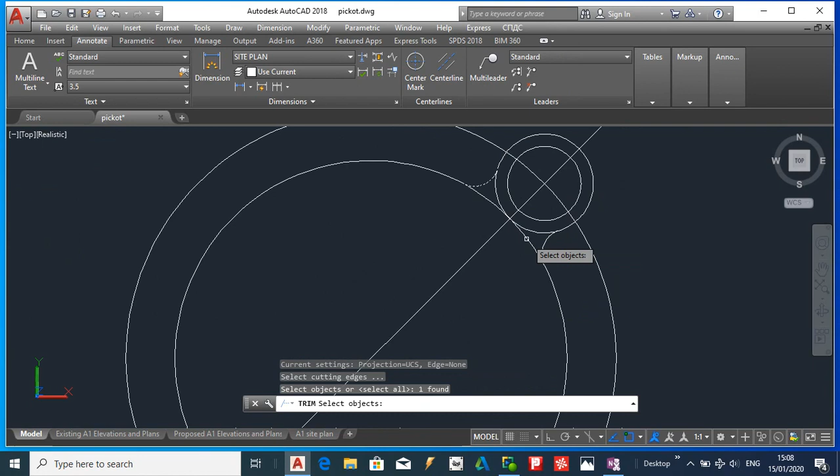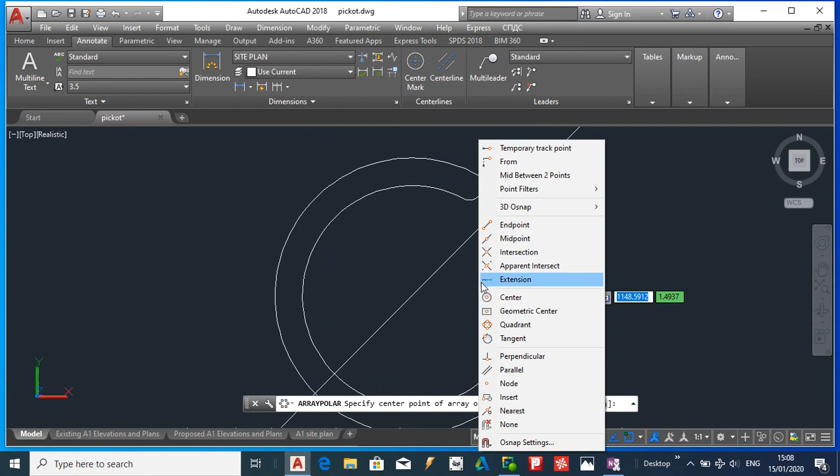The next thing I need to do is rotate that, array that around 5 times. Select that, modify, array, polar, and I want to pick the center of this circle here. It says 6, but I'm going to just leave it at 5, so it looks pretty much like the last one I did.

I still need to do a bit more trimming, so I'll just select those parts here.

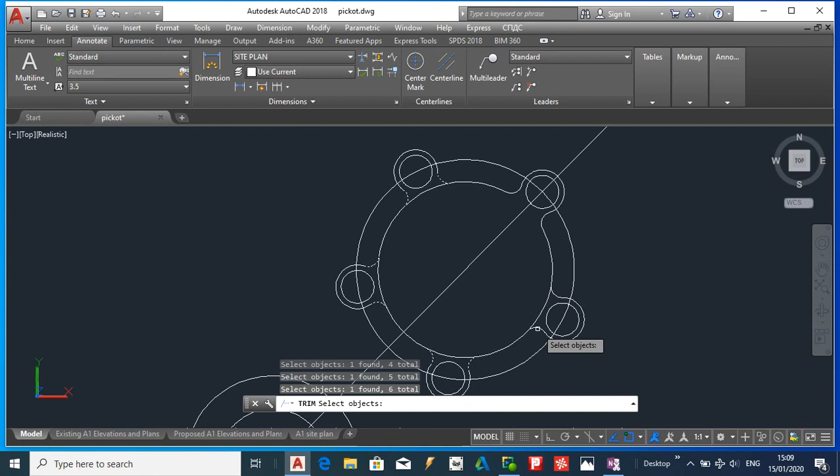And the next thing I want to do is create a fillet between this circle and this circle. So I'll bring up my fillet command again, and I'm going to select the radius of 150. The same over this side.

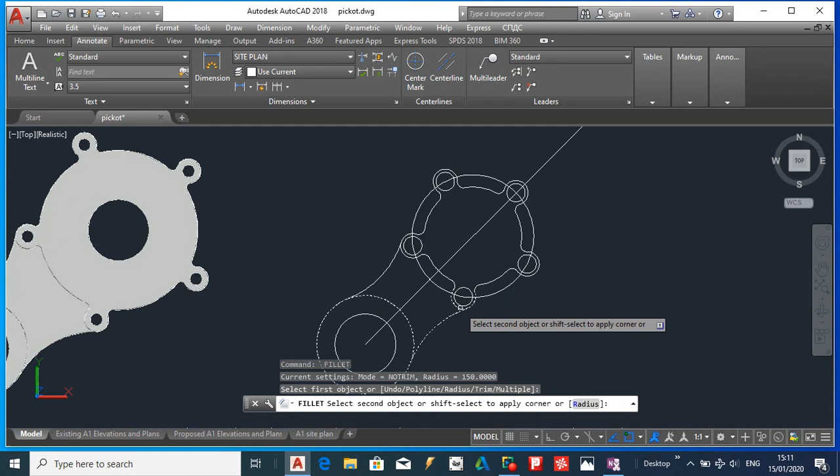Okay, so that's basically my part created there. The next thing I want to do is get rid of that line. And the next thing I want to do is get rid of this as well.

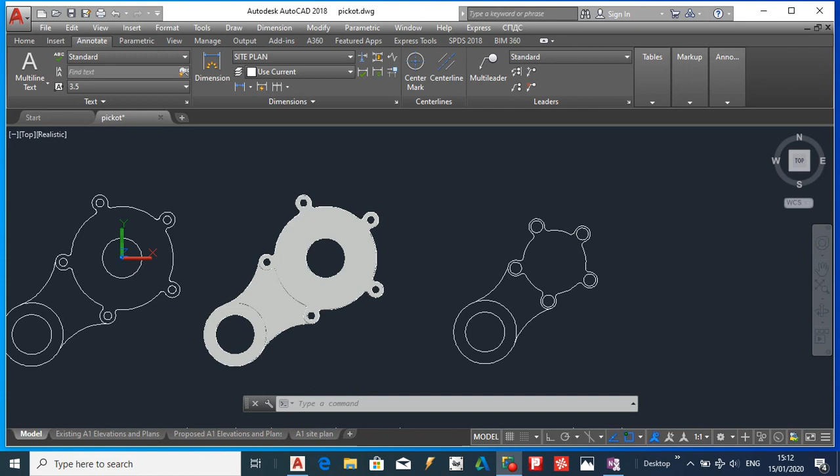So I want this to look like a 3D part like this one here. And if I just angle this around here, what I'm going to do is use a command called bpoly.

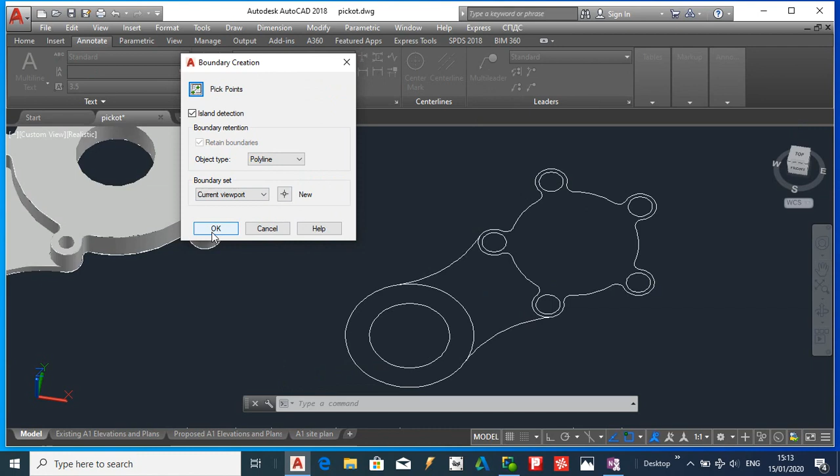What this will do is figure out if there's a boundary, then basically change that boundary into a solid. I'll show you how it works now. I'll just say bpoly. Now I want to pick in here. So that's grand, that's done.

The next thing I need to do is put a fillet between these two circles. So I'll start activating my fillet command. I'm going to select the radius of 150.

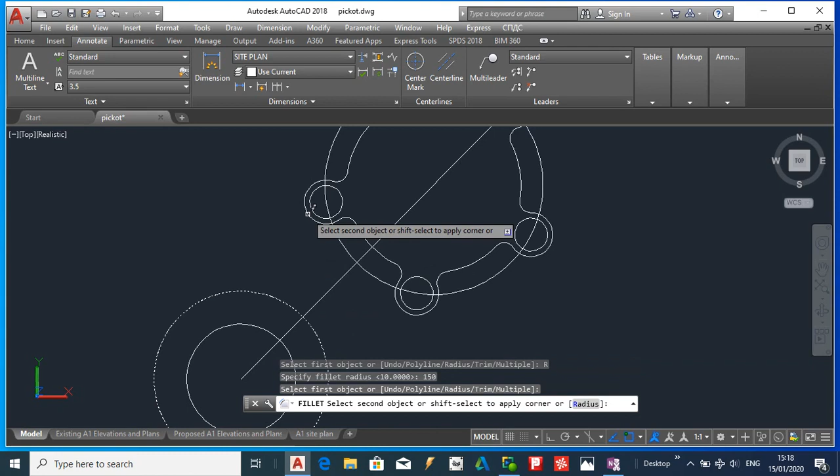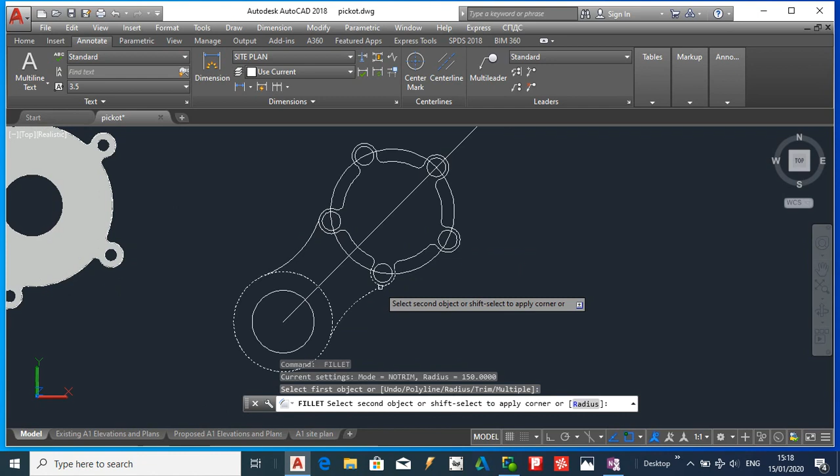Grand. So I'm going to delete this, don't need that anymore. The next thing I'm going to do is just move this around so you can see. I need to extrude these parts.

First I need to use a command called bpoly, so we basically turn that into a region. So bpoly on the command line, pick the internal points. I want to pick that. That's fine, so you can see it there, it's one piece.

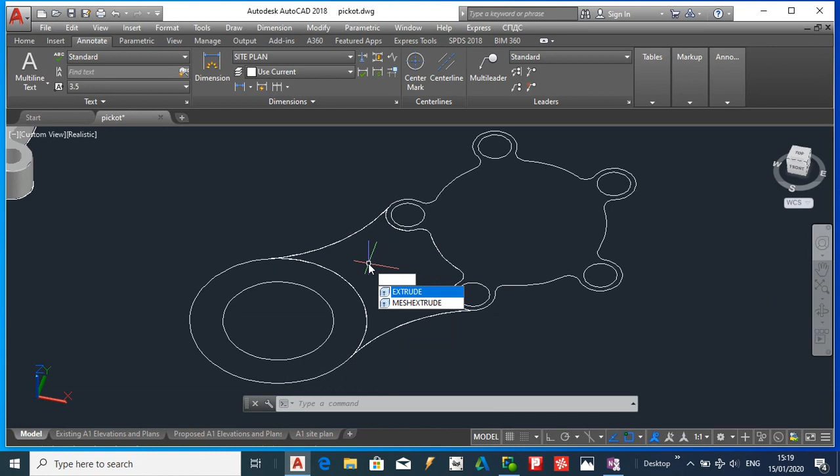So if I go extrude now, I can select that, and then I can go up. I'm just going to say 20 mil.

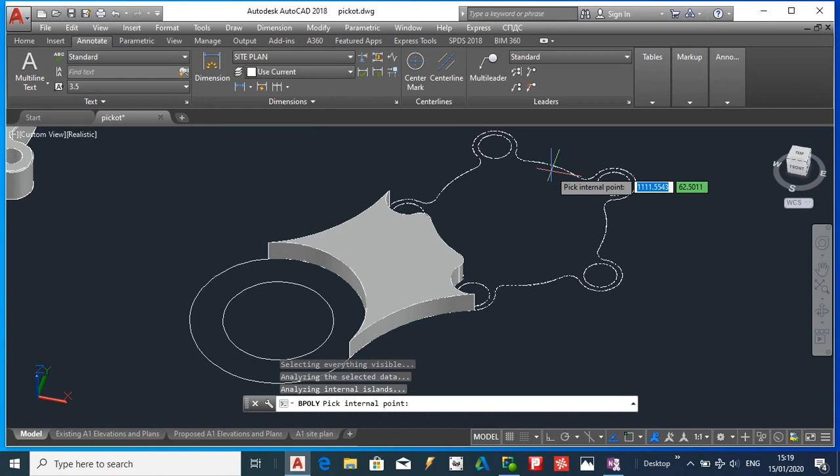So next, same command, I can use bpoly. Watch this. Recent input, bpoly. So I wanted to select this, and you see it's selected it there. See the way it's dotted, I know it's good.

So now I can do extrude, right click, recent input, extrude, select, and I'm going to bring this up around maybe 30.

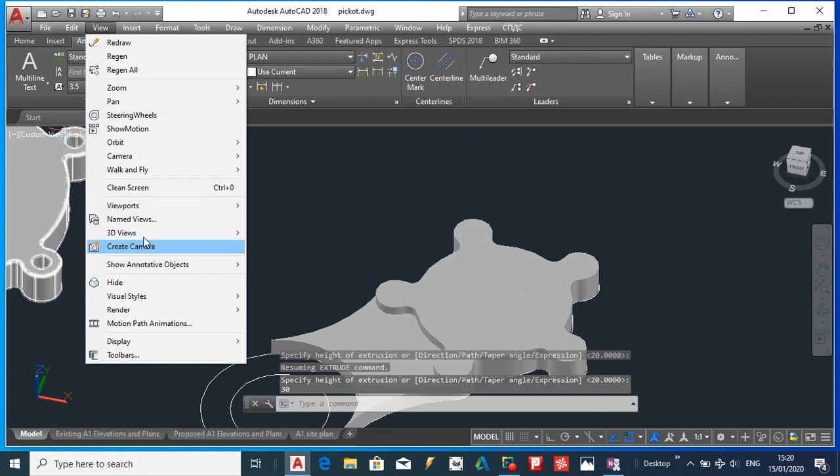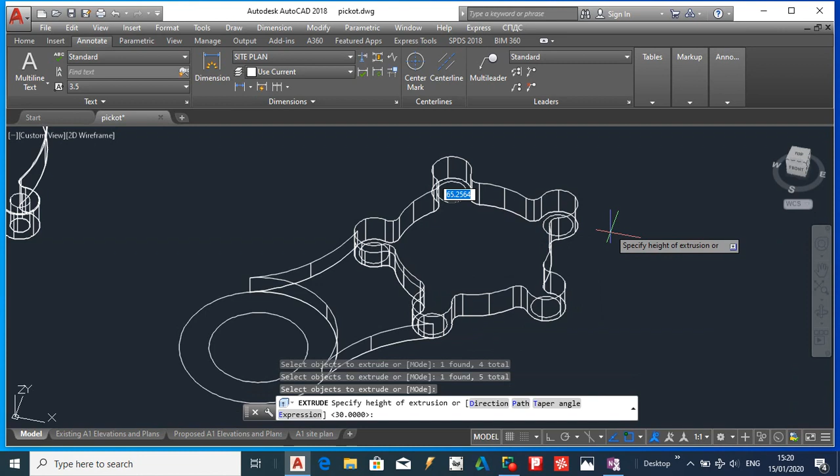I want to go back to wireframe view because I need to extrude those circles. So right click, recent input, extrude, select those circles, and I want them to come up about there.

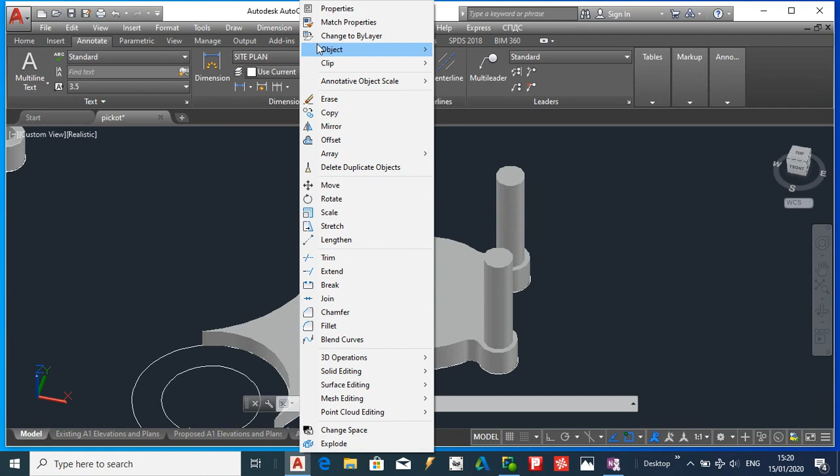So I'll just go back to the realistic view. What I need to do, I need to subtract those 5 circles that are extruded away from this particular part, and the way to do that is to use a modify command, a solid editing one.

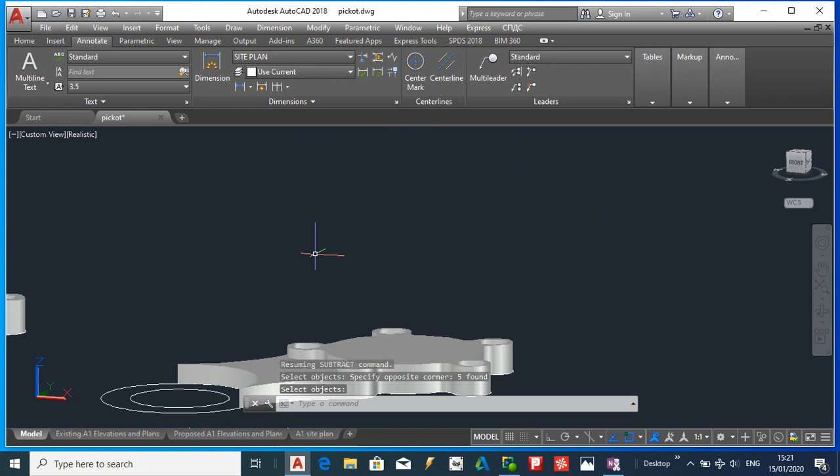So I'm going to select subtract. It says here select object, so I'm going to select this, this is my main object, right? And I'll right click because I want to subtract those 5 items. So I'm going to window select them, and when I right click, bam, they're gone. So that's pretty much that command done.

So guess what I'm going to do? I'm going to use bpoly here as well. Pick points, and I know that's good to go.

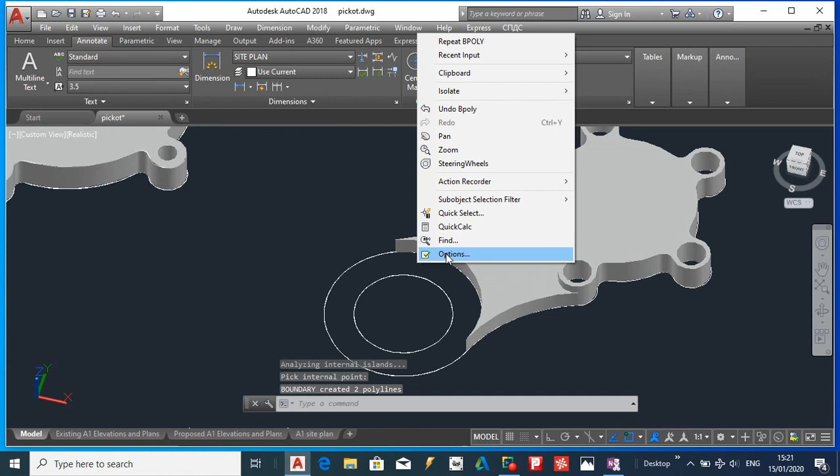And what I want to do now is extrude this. So we'll go up about, just say 50. Back to my visual styles wireframe. I want to extrude this one up as well.

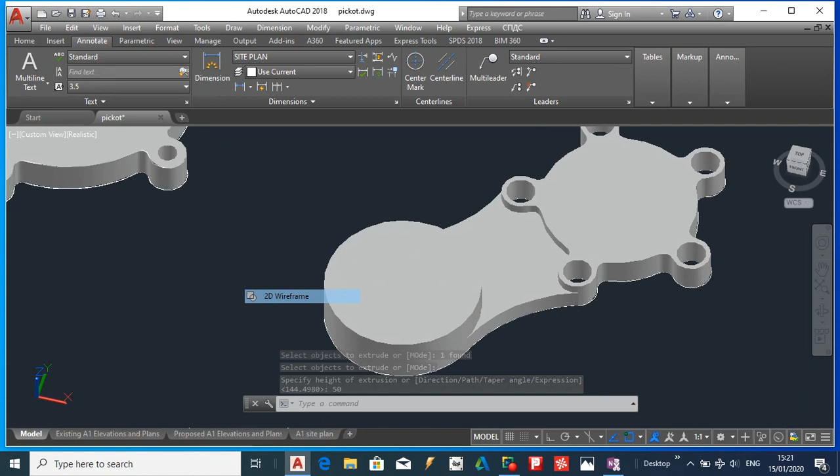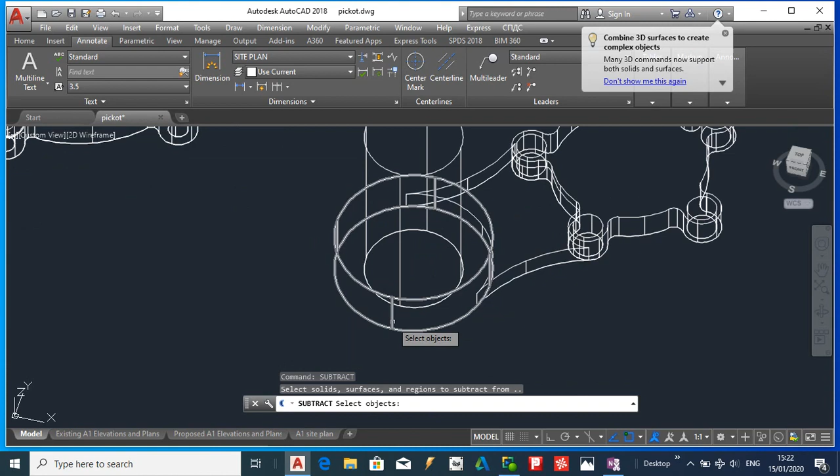Now the height of this doesn't matter because guess what I'm going to do? I'm going to subtract this from this. So again, I'm going to bring up my subtract command, I'll select this, right click, and I want to select, left click this one and right click.

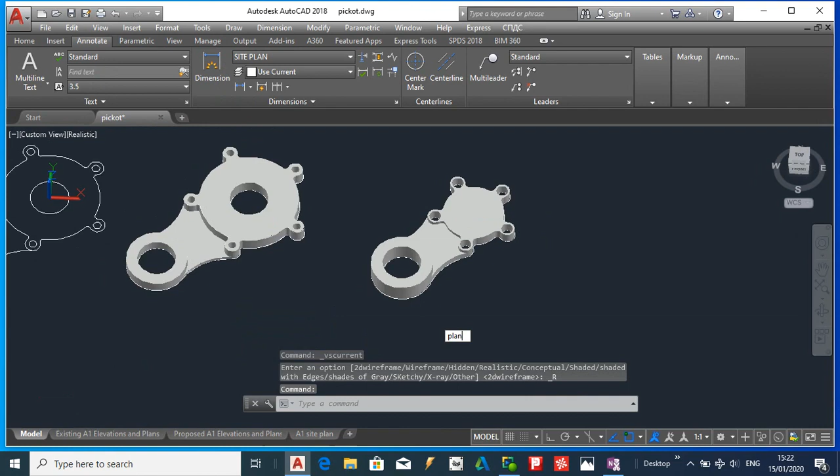And if I go back to my visual style, let's see, excuse me, visual style, if I go back to realistic, there we go. So that's how you create that part.